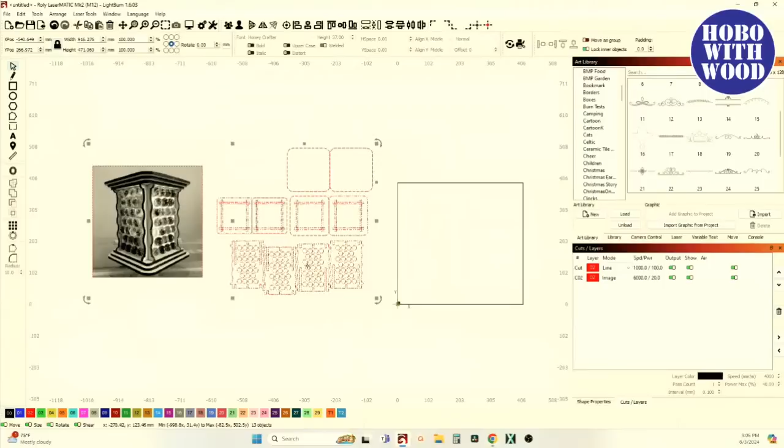But he was right. Check this out. Let's go back into Lightburn. There's the lamp project, and we're going to discuss that and all the different possibilities you can do with it. But if you've got a shape in Lightburn, I've just got a square, and then I wanted to cut out part of a circle of it and put it on a toolpath.

And I've got two shapes here. This toolpath is going to be the shape that I'm going to cut out of this rectangle. I select the square first, then select the circle, and then use tools and cut shapes. Well, that cuts it into two separate pieces. And if I want to get rid of this piece where the circle is at, I then have to select it and hit the delete button, and it goes away.

If that's the case, what I said I should have done was A subtract B, using the Boolean tools, and that gives you that result without leaving an open shape.

Now I just seen something. Ooh. Did I just learn something even more? Let's see here. So, A and that, and cut tools, cut shapes. Yeah, okay. So it doesn't give you the same result, because... no wait, it would if it's in fill mode. I take that back. It will work. I keep learning.

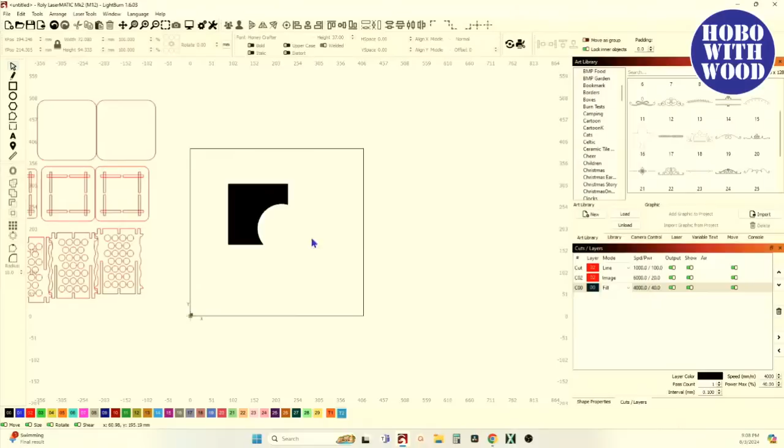So if you take this and put it in fill mode, select your square and then select your toolpath and use cut shapes, then you can select that bottom corner and delete it, and it'll give you that result, and it's closed. You can accomplish the same thing as A subtract B, but it only works if it's in fill mode. So that's new to me.

In fact, when I first read it, I said that doesn't make any sense, because the shape is the shape. And when you use that cut tool, you're using it like a cookie cutter to cut that out. But when it's in fill mode, it's looking at it like a solid piece of paper, and now you're just cutting it out. It's going to close all that out and take it away.

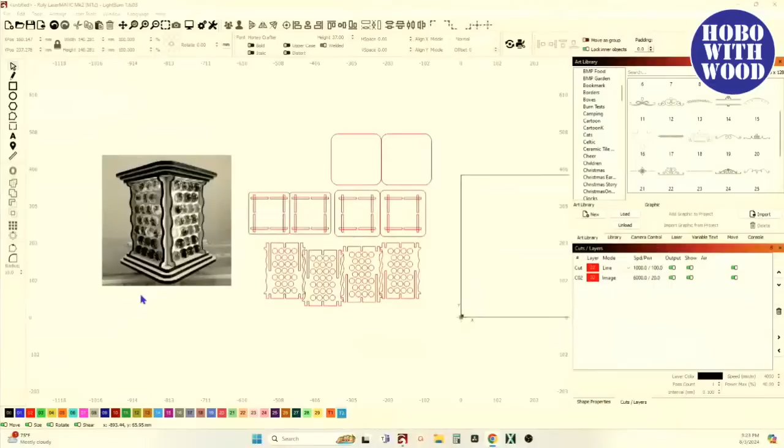All right, Lightburn. As I said, these four shapes are actually all identical. These two are facing up with the slots up, these are slots down - just two, duplicated and flipped. Then there are three different sizes. Two have slots in them for it to slide down onto, and the top and bottom do not have the slots, so it gives it a nice finish.

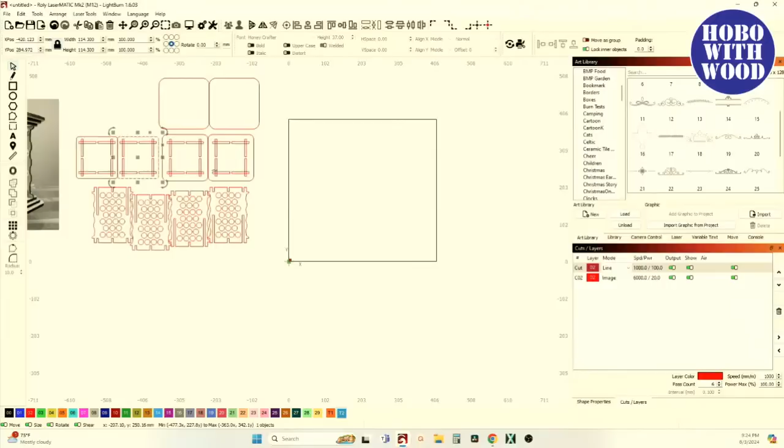First let's talk about the bases. I started with just a 4.5-inch square because of my puck and the material I used. I needed at least 4.5 inches out here once I allowed all the room, because my puck was about 3.5, or right at 3, give or take. Let's see if I get a 3-inch in there. Well, I got a tight fit, yeah. I think it's a 3-inch puck in there. So that's how I determined my size.

Most of you know how to use the offset tool in Lightburn. But using the offset tool and generating three different squares by size and using your radius tool can give you different results, and you might like one way versus the other. We'll show you what happens when you use the offset tool to create all of them versus creating new rectangles - squares, really - and using the same radius on all of them.

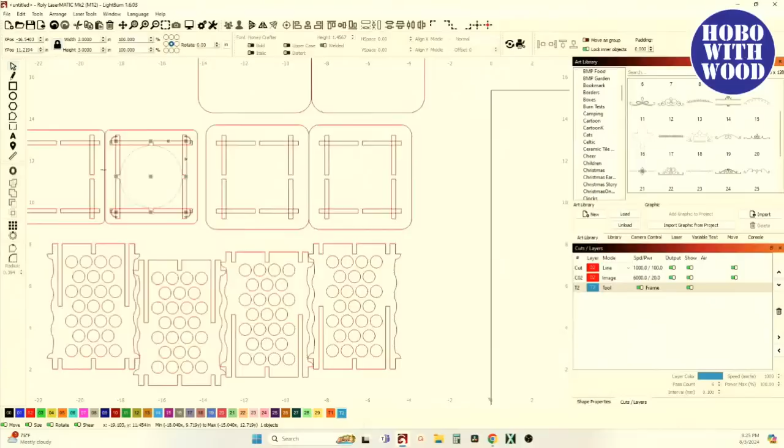So come over to your square tool, hold shift, and draw out a square. I told it I wanted 4.5 inches, locked my aspect ratio to 4.5 inches, which is 114.3 millimeters. Then I did a 1/4 inch radius - I come down to my radius tool, tell it to do a 1/4 inch radius, and went around to my corners and put in that 1/4 inch radius. If you're not worried about doing what I'm getting ready to do, you don't have to use the radius tool, but I did that 4.5 inch square with a 1/4 inch radius.

If you do another square and want it to come out a 1/4 inch around either way, that's a 1/2 inch extra, so this becomes a 5 inch square. I want to use that same 1/4 inch radius - come on, there, there, there, and there. Then put it in place and center it up. That was 4.5, that's 5. Now 5.5.

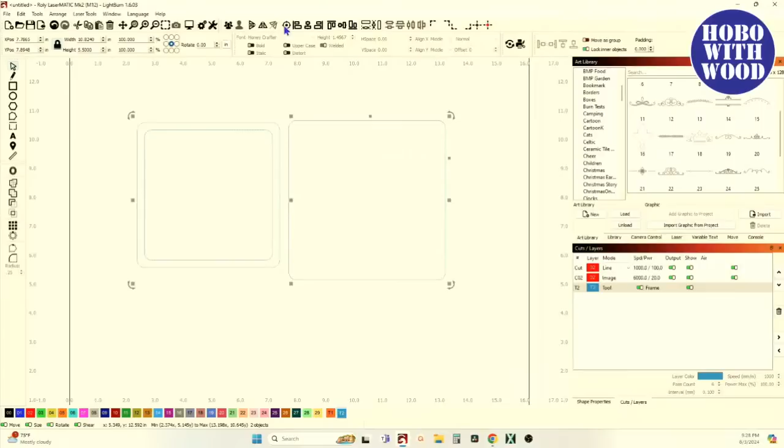All right, now put that in place. So there you have a 1/4 inch gap around the entire perimeter and a 1/4 inch radius on all 3 pieces, and that gives you a fairly square base. Now, if I duplicate my very first one, bring it over here, and just go to the offset tool and do a 1/4 inch offset outward - do not delete my original - say okay, then do it again and say okay.

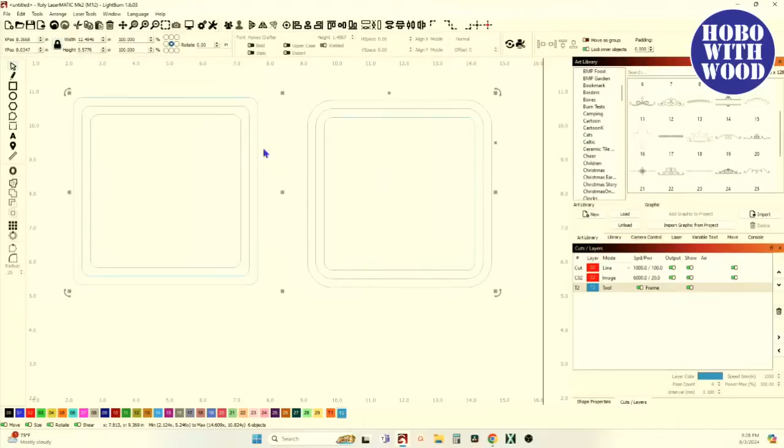I'm at 5.5 total size for both, but look, it's two completely different looks between those two pieces. This is more of a square base, and this one's getting rounded off more each time you come out, because as you do an offset, you are moving your radius. This is a 1/4 inch radius, this is a 1/2 inch radius, and this is a 3/4 inch radius. The radius increases each time.

Question from Carl: couldn't you use the shape properties instead of the radius? You can.

And that's why I said, if you weren't worried about doing a specific 1/4 inch, I did this by using the radius tools. But what Carl's saying here, if you come over to shape properties, say you've got a square, and we had a 4.5 inch square. If you have shape properties open, you can come down to your corner radius and just tell it 1/4 inch radius, and it puts four 1/4 inch radiuses on there. So yes, you can, Carl. Like I said, there's always another way to do things in Lightburn, and I'm happy to show that. But if I tried to show every single way to do every single thing that can be done in Lightburn, we'd be doing another 5-hour live stream. We ain't doing that ever again. There's always another way.

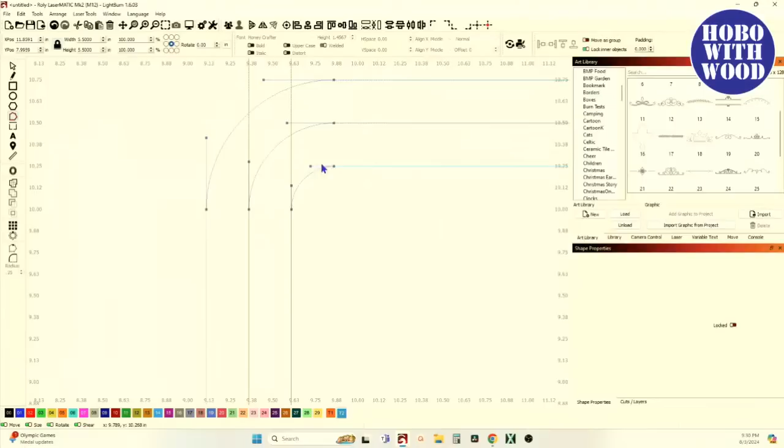All right, but I wanted to show you the differences between doing the same 1/4 inch radius versus doing offsets, so you can maybe see it. If I bring this tool line out to that edge and bring a tool line to this edge, then grab these and put them in node editing, you can see here this is a 1/4 inch radius, and that straight line comes up and it's not there. It's a 1/4 inch over here. Well, if I do the same thing with these, snap it to there and snap this one to here, and put these in node editing, you can see this line lines up where that radius starts, and this one starts where that one ends. So it's still symmetrical and it still works.

They just give you two entirely different... wrong button, stupid. Undo. Delete that, delete that. It just gives you two different end results on what shape your base will be.

Yeah Jeff, I'm saying never, never, never, never, and never, never, never do another 5-hour live stream again. Yeah, nope, sorry Kent, nope nope nope. Yeah, y'all silly, okay.

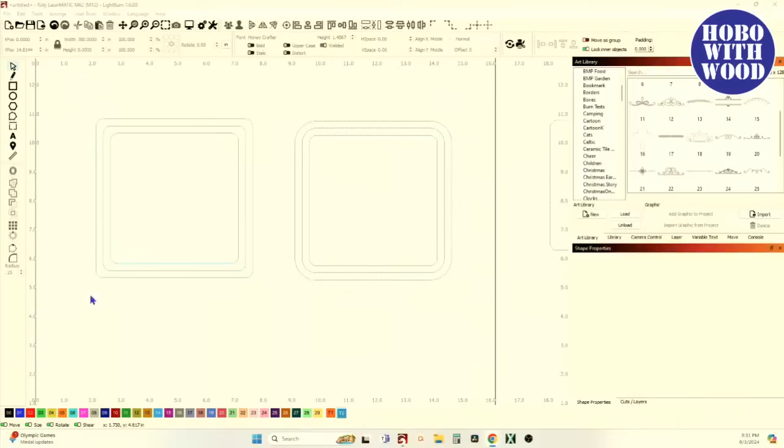So with that demonstration done, here's how you get some different looks. Like I said, I did the offsets. I created the first one and just did an offset for each of the three. So I'm just going to grab this, duplicate it, and send it to the center of the page. And some of you may not be aware of this. Right now I'm focused on this over here. I duplicated it and used my tool up here to send it to the center of the page. This little dotted zoom tool, if it says zoom to frame selection, click it, and it's just going to take you to wherever on the page that piece is. That's a cool tool too.

So if I take these pieces right now, I'm going to put them on a tool, ungroup it all. Ungroup. And I'm going to get them all, put them on a tool layer, and turn my tool layer off. So there's my 4.5 inch square that I put the radiuses on.

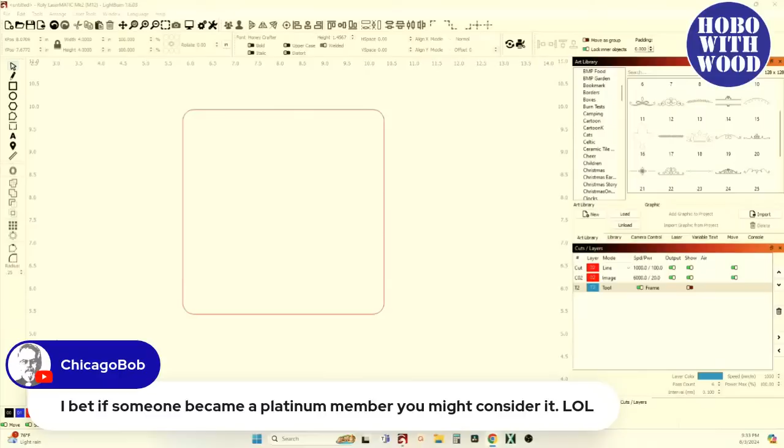Well, it's not a question, but there's a comment. Bob says, I bet if someone became a platinum member, me, you might consider doing it. Well, for those who aren't aware, there's actually four levels in Patreon. You've got bronze, silver, and gold. Wrong button. Bronze, silver, and gold. Bronze is $3 a month, silver is $9 a month, and gold is $20 a month. There is a platinum tier, and no one has signed up for platinum. Platinum is $5,000 a month. If someone was a $5,000 patron on Patreon, I'd come to their house once a month, fix their dinner, and talk to them about Lightburn and laser creations until I'm blue in the face. But yeah, for that platinum patron, I'd do a 5-hour live stream every day solo for them for $5,000 a month.

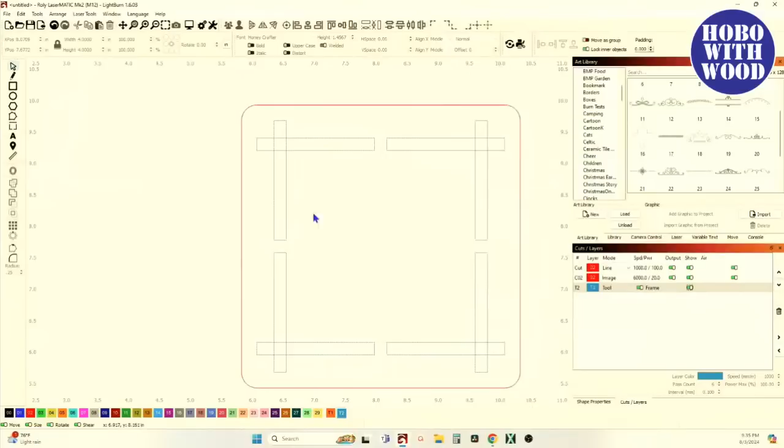So where do those need to be? Well, if you come over, those obviously you cannot create these until you've got this piece designed. So we're going to grab this and set it over here for a second. And I'm going to grab—well, we're not even going to worry about these right now. We're just going to start from scratch completely.

If I draw out a rectangle, whatever size it was I determined it was going to be, you start out with a rectangle. And if you're creating this piece for you to make from your material, you already know what your puck is, you know what your slit's going to be. I already knew I was going to be making it out of this 5mm maple that I've got, so I knew my slots were going to be 5mm wide. Depending on what material you're going to be cutting yours out of, you wouldn't make your slots that size—it's according to what material you're using.

Make that more like that. And so I said I had a 5mm slot. I'm going to unlock my aspect ratios, go back to metric. I'll say it's 5mm wide. And then how high, how tall does it need to be? Well, I wanted to do 3 bases at 5mm, so it's going to be 15mm tall.

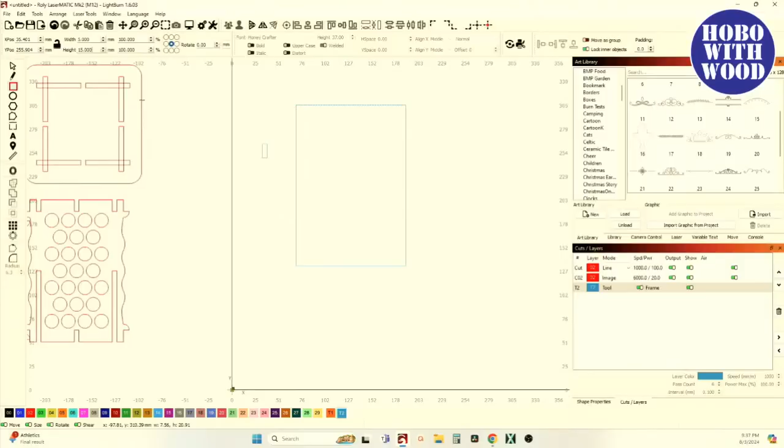So that would get centered and at the top like that, and duplicate it and put it at the bottom. So that's the first placement for the first slot. Then I need slots down either side.

So I'm going to come over here and just draw out a slot. I'm not even going to worry about the sizes because I'm going to key in what I want it to be. I'm going to tell it it needs to be 5mm wide. And then I'm going to bring it over here and align it to the top rather. And before I do anything else, I'm going to come back up here to my gears and set my movement.

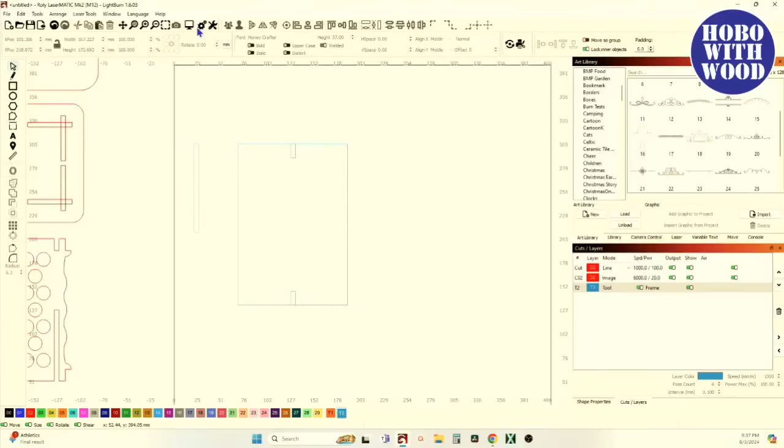I've already got it set here—my arrow movement is set to 10mm right now, so I said okay, that's what I want. I'm going to come back to this piece, select this, I want to go to top left. Then I'm going to select just that one, and use my arrow key to move it over 10mm.

Now I'm going to look at this piece right here, and its current height shows 173 points. I'm just going to tell it, change it to 170. And now I need to put everything, resize everything, or put everything back.

We'll group those temporarily and put it at the top and put this at the bottom. And if this was 170, I need to ungroup these, select just this one. And now this is where you're going to change your anchor points. Right now I've got my anchor point in the very center. Well, I've already aligned this.

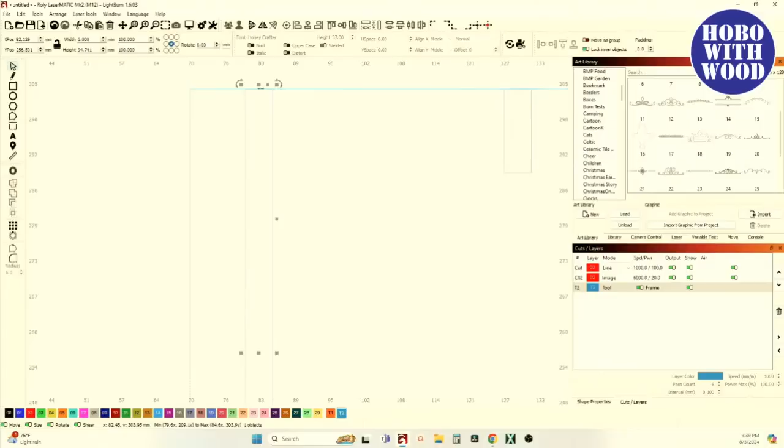I know I want it here in this position, 10mm off this, and I know I want it aligned to this top. So when I move this, I don't want to move it left or right or down—I only want to bring this up. So I'm going to change my anchor point to the center top.

And now if this was 170 high, I'm just going to come over here and say the height needs to be 170 divided by 2. Key that right into the height field and hit enter, and it's going to do the math for me and say okay, it's 85mm. So now I can Control D, duplicate it.

Hold my shift button, select the rectangle and tell it to align right. It didn't duplicate—undo. Select that, Control, and in fact, you just put this all on a red layer so you can see it a little bit better, or a black layer even. There we go.

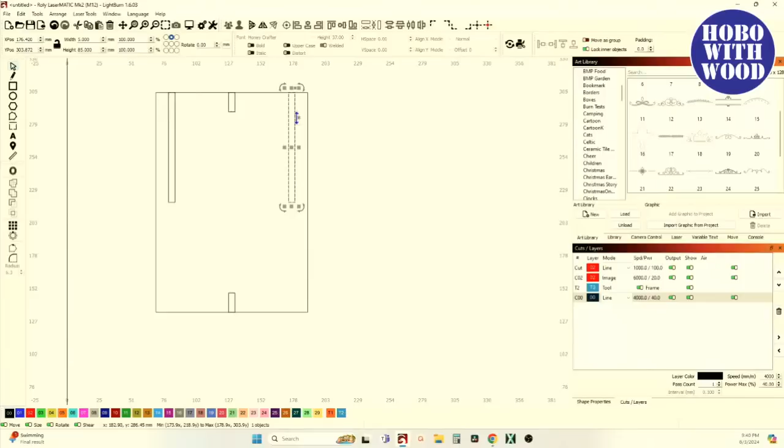I couldn't see the ants duplicate, but there's the duplication. Now hold my shift button and select that, tell it to align right. Select just that piece, arrow over one time to the left. Now it's positioned correctly. So I hold shift, select this one, group them together, hold shift, select the square, select that group, and do the Boolean subtraction, A subtract B. Group these together, A subtract that group, and there's the shape of this side piece.

I've got a groove at the bottom. Actually, I don't have my shapes here at this side. I designed this, put it together Tuesday and dropped it Wednesday, and I've forgotten what I did. But that's what's great, we can just undo and go back.

So these slots are done, but I need to have this size slot on each of these on either side, on this end. So I'm just going to undo one time, ungroup those, grab that, duplicate it twice, Control D, 1, 2. Now hold my shift button, select that, align it to the left, select it, arrow over one time.

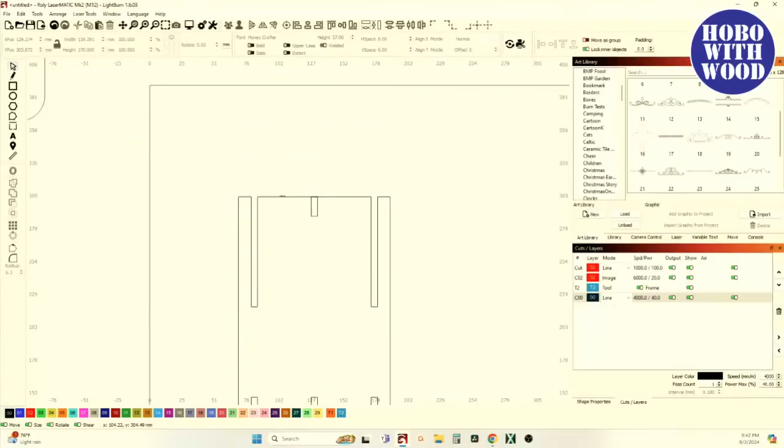Square or the rectangle, A subtract B. That gives me those, and then A subtract B. All right, now that shape is done.

If I say Control D, duplicate it, arrow it over, select them both, Control D, duplicate them, and then rotate them. Those four pieces would interlock together and make a perfect square. All you need now is just the bases to hold it all together, because I didn't put any glue on any of the four pieces to glue them up, just slid them together, interlocked them, and then glued the bottom on, didn't even glue the top on.

So let's look over here for any questions or comments at this point.

Let's see here. Oh, looky, who's in the house? Hey, and I don't know... my brain just went dead. It's too hot in here, ladies and germs.

Patrick, Light Source Engraving. Patrick, I saw your sledgehammer and commented on Facebook, but it looked like my comment even went away. Patrick did a sledgehammer the other day with one of his lasers, and it had the flag in it, but the union in the flag was blue, and it was a brilliant blue. Almost looked like it was painted to me, and I was like, did you get that kind of blue out of the laser? That was awesome. It wasn't so much that the blue was vibrant, it was all vibrant and uniform. It looked really, really good. So if you're still here, Patrick, that was awesome work. I liked it a lot. That was one of my favorite pieces I've seen you do.

Andy says, sorry, I got distracted. Did you make this with 6 mil? No, I made it out of hardwood. I've got some maple that I've processed, and this is 5 mil hardwood maple. It's got some nice grains in it when you put a finish on it. But I had a lot of 5 mil maple that I processed, and that's what I used here. You could use 4.7, 5 mil, or 6 mil plywood. I wouldn't do it out of anything real thin because now I got this off.

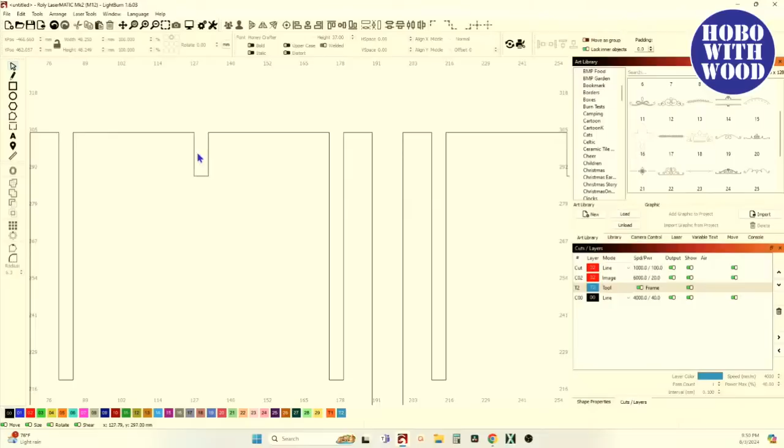So let's jump back over here to the design process and go back to LightBurn. All right, so I've got the basic shape set up for those to go together. This size was determined by the thickness of the material and then how many pieces I was going to stack on here for the base. I went with 5 millimeter material and 3 pieces, so it was 5 millimeters by 15 millimeters, or 5 by 15. This one was 5 millimeters and half of the overall height of that square. And then these were 3 of the 5 by 15s.

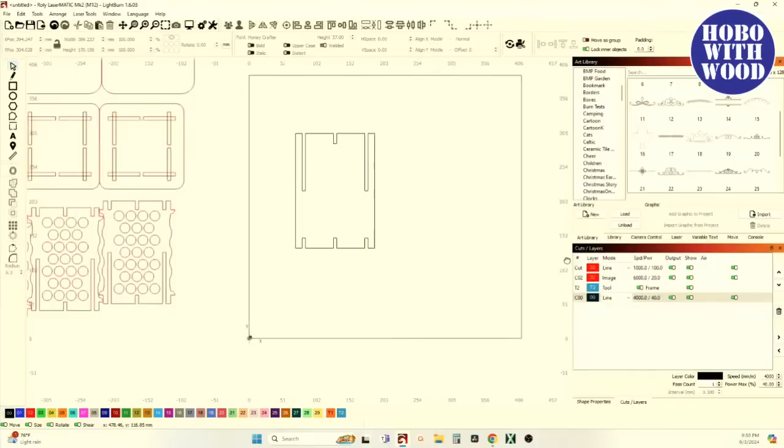Duplicate it, rotate it, and now they're going to interlock together, and your tops and bottoms are going to slide on. Now if you want to, and because these are all the same piece, there's no difference in any of them, if you want to do anything creative, delete all those. If you look here, I've got the wiggles down the side, and then I also placed these little quarter round pieces here, so it's kind of like quarter round molding up at there. It's like, okay, well, where do those go, and how did you do that?

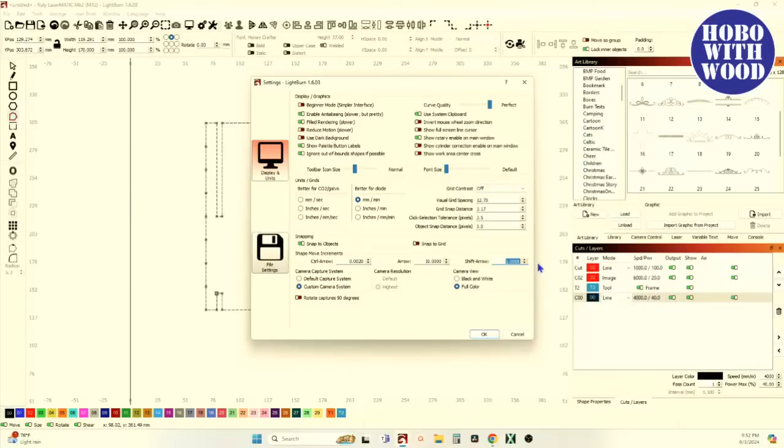Well, since you only have to do it to one piece, you can come in here to node editing. I'll come up here just so you can see how the letter M works. A lot of you guys have seen me do this already, but in node editing, when you hit the letter M as in middle, there's no nodes in here right now, but you hit M, it just created that node right there, puts it in the middle of those 2 nodes. Now I'm up here at the top corner with my cursor, I'm going to hit M again, puts it there. It'll keep putting it in the middle of the closest nodes. So once you've got all those nodes in there, let's come up here and check my movement tabs. I've got 10 millimeters, and let's do a shift movement of 2.5 millimeters.

No, let's just do 3 millimeters. Okay, so now that I've got that done, I'm going to hover over each one of these nodes and hit the letter S, hovering over each node: S, S, S, S, and S.

Then I'm going to come up here, grab one, skip one, grab the next one, holding the shift button. The squares are the tangents for the smooth curves. You want to get the round dots, every other one. So skip that one, I want this one, skip that one, I want this one. Now I've got every other node selected.

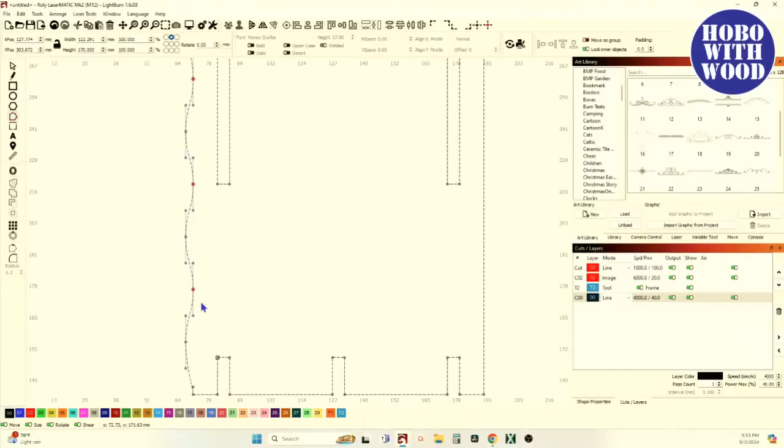I'm going to hold my shift button and arrow out one time, then come back in and grab the other ones, here, here, and here, and arrow in. Oh, I didn't hold my shift button. Shift, there we go.

So now I would repeat the same process over here, and that'll give me my squiggly lines. I'm still at 5 millimeters, or I think that's about 8 millimeters, give or take, so still going to be fairly strong there.

And here, what I might look at is, during my design process, I'm like okay now, do you know why airplane windows are round? They're all radiused because corners are weak points.

So in this design, when I'm looking at this right here right now, see how close this corner is to the edge of this material, that is a vulnerable spot. So if I was designing this, I would actually go back and undo.

And go back to node editing and see where this one's at. I would select it first, skip that, come up here, and oh, I didn't mean to do that. Oh, now it's going to thunder. Now here's something, if I try to do undo, that works, but if the node was still selected and you try to undo, it wouldn't work.

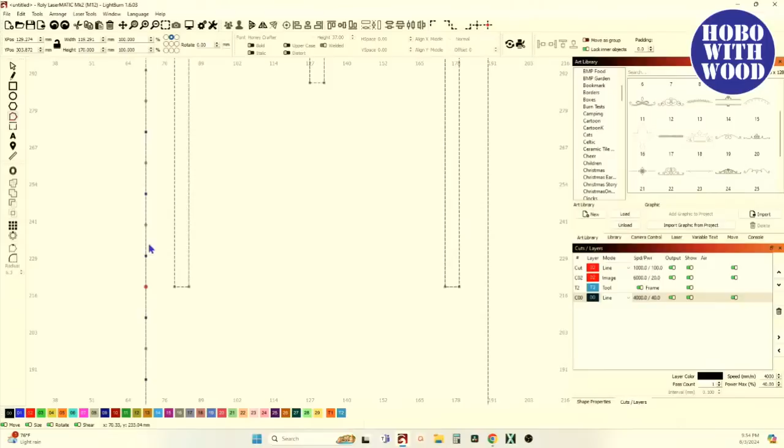So I'm going to grab this node, hold my shift button, skip this one, grab this one, and we're going to leave that there like that. Then come down, skip that one, and grab this one. Now instead of bringing that node in, making that a vulnerable spot, I'm going to hold my shift button and take it out.

Before I move these, I'm going to do my quarter round. I'm going to get my circle and draw out a perfect circle. As I said a minute ago, how many ways can you do things in Lightburn? A bunch of ways. Here I'm going to get, I want a quarter round.

And the way I'm going to do this is switch, draw out a square, take and grab my circle right in the middle, and I'm going to drop it there.

First, I'm going to show you 2 ways to do this. Duplicate that, Control D, duplicate it, bring that over here. Right now, if you go into node editing, you don't see any nodes, but if you convert the circle, right click, convert it to a path, go to node editing, and I'm going to select this bottom node and delete it by hitting the letter D for delete, then hover over that line and hit the letter L for line.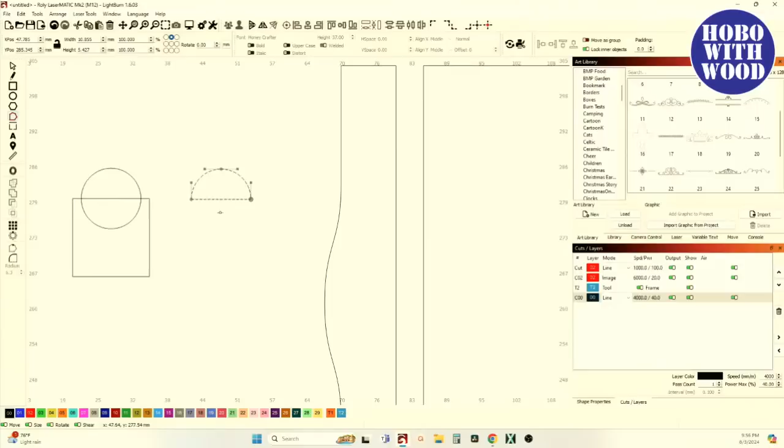And there's a semicircle. Then I'm going to come over here to this one and hit the letter D to delete. Well, actually, I don't want to completely delete that one. Before I do that, I'm going to come back over here and grab one of the tool paths, and snap it right there in the middle. Go to my node editing again, and actually not even delete it, I'll take this, hover over that line and hit the letter L for line, made that a line.

Now just drag that node, or I'm not going to drag it because if I drag it, it can go up or down and that won't be right. And here you see the node is still selected, it's red. And if I hit the undo button, well hey, now it works. Used to, if it was selected, it wouldn't work. Maybe they fixed that.

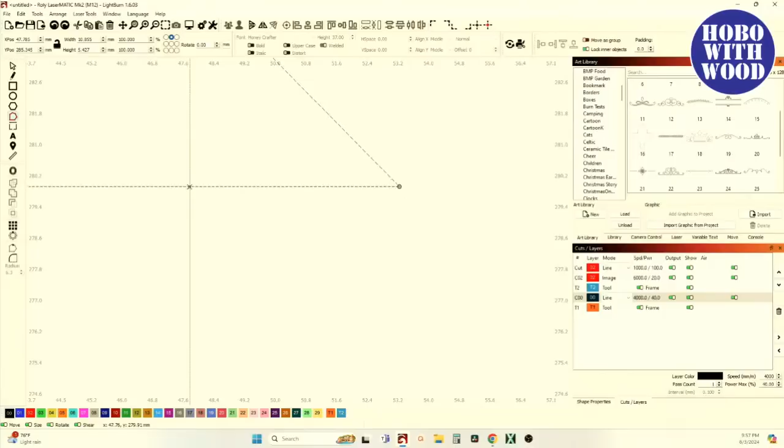So instead of dragging that, I'm going to hover over here and hit the letter I for insert. That's where I want that to be. Now, undo, select that, and letter D to delete it. So there is a quarter round. That's one way to do it.

Or you could use your Boolean shape, A subtract B, the Booleans, to get that, and then draw out another one. I didn't want to draw that one out, I keep forgetting to get my selector tool. Selector.

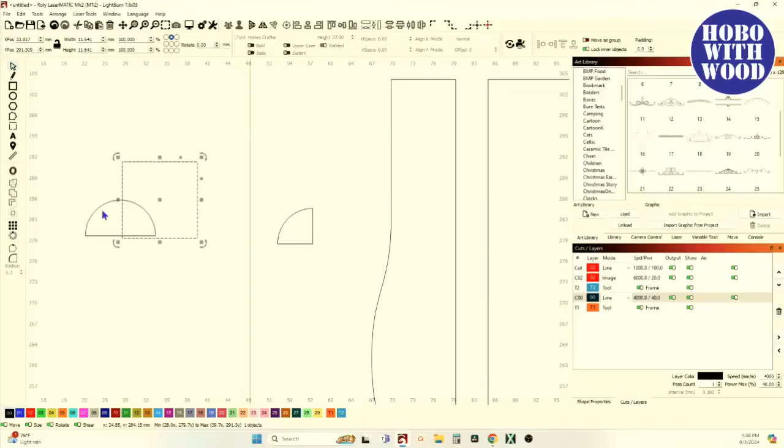Snap it right in the middle there. And then A, subtract B. And there's a quarter round. So if you're not real good with node editing, you can get there by just using cut shapes to do those things. There's 100 different ways.

There's always more than one way to do something. And if anybody tries to tell you that this is the one way and the best way, ignore them, because there is no one best way. A right brain person doesn't think like a left brain person, an analytical person versus an artistic person. You may not comprehend that easily what they're talking about, but there's another way to get there that your brain goes, that works, I understand that. Well, embrace that, do that. But never let anybody tell you there's one way to do things.

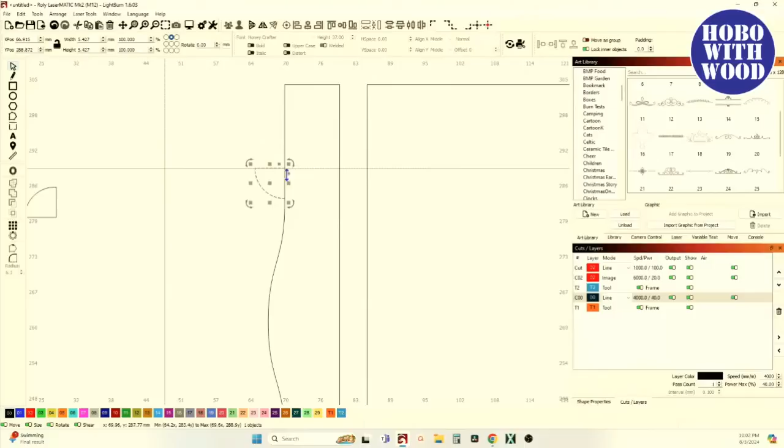And I grab that corner right there once I get my crosshairs and drag it right into there. Now I've got that positioned right. I'll grab this one, bring it over here and rotate it, and grab my crosshairs. That's not rotated correctly. Get it there. There we go, grab those crosshairs there. Done.

Now I got to do the same thing at the bottom. So I'm going to hold my shift key, grab that, say Control D, duplicate it, bring them down. I'm not going to worry about positioning them right now, but these two, group those together and weld it. A and B welded together, and that puts those tabs on there.

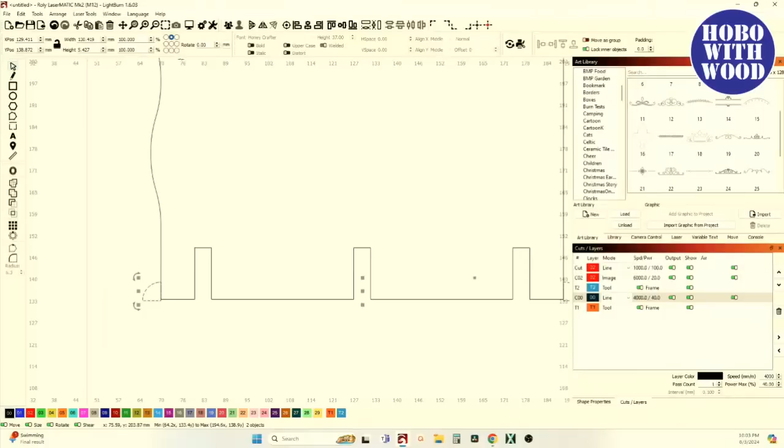And these, grab those, and we need to mirror them. I can grab, and you can grab those toolpaths from anywhere. I'll come up here and just grab another one and bring it down to there. And bring those. Come on, get it to snap right into the... oh, messed it all up. Get in there, and get my crosshairs there, and snap. And that one's not right.

Snap. Now grab those, group them. Grab those and weld it. All right, so those are in position.

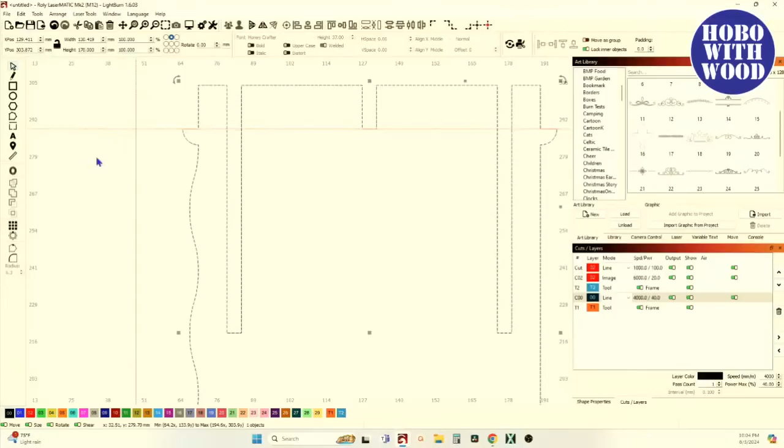And now if I wanted to come back over here and move some of those nodes inward, I knew these I moved out. So let's grab this one and this one and just bring it in. Hold my shift button and bring it in.

Well, no, that's not going to work because I've already done some other stuff to it. So if you're going to do that, look for that weak point first, move it away from your corner so it's not any weaker than you want it to be, or that you can prevent it from being any weaker than it could be. Make it as strong as possible - there we go, that's the words I was looking for. Make it as strong as possible. Come down there and find that middle point. Move that node out instead of bringing it in. Then once you move the ones out, bring the other ones in. Then go add your quarter rounds in, if you're going to do that.

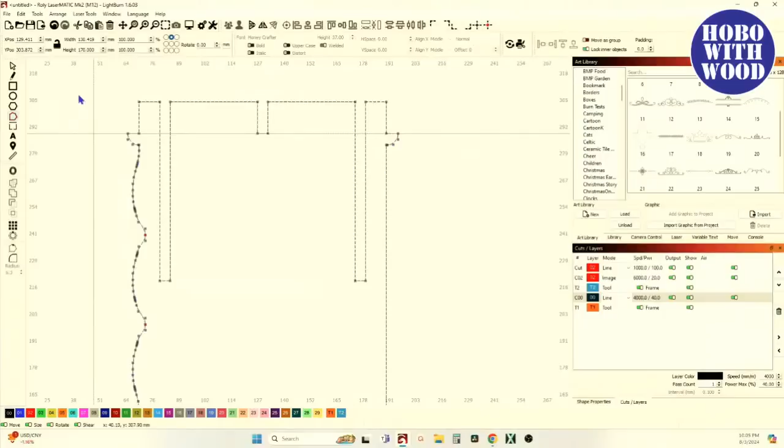So go back, there we go. And then go back to here. So that will give you your wigglies, the wiggles, and give you your quarter rounds. And then once you've got that done to both sides, you can just duplicate it and then duplicate your duplications and rotate them when you've got 4 sides.

Looking at it, wouldn't take too much to change it into a pencil. Yeah, yep, leave the top off. Yep, and that's the thing. That's why I say this design, this concept.

I'm doing it - this one was an LED light, but this box, the way that it assembles and goes together is so much easier than a whole bunch of slots and tabs that you're having to put, 12 slots and tabs together and line up all your fingers and worry about your offsets and all that, or your kerf and everything else, because it's one design. You're not having to create male and female slots and fingers and slots and tabs. You've got one design, you're creating one panel, and then duplicate it, and then duplicate it 4 times, and flip 2 of them. That's why I said the possibilities of this style of box is pretty endless.

So yeah, absolutely a pencil holder, and this would be a little bit tall for a pencil holder as it stands, because with a brand new pencil it would work, but as they get sharpened, they'd be kind of small. But you could do half this size. It's just an easy way to put a box together. But absolutely, you are 100% right.

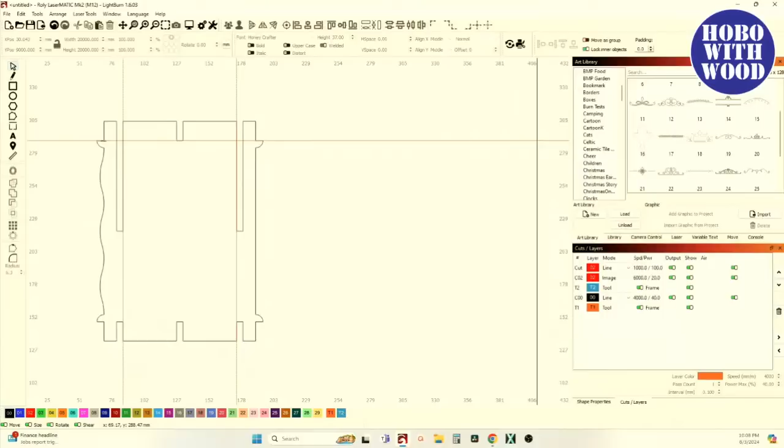And then I need to drag down, and that's going to go to that corner right there. And drag another one down—oops, didn't get one. Drag one down here, and it's going to go to there.

So that area in between those toolpaths is where you could place your marbles and or your design, whatever you want it to be. And what I would do, if you're going to create a base template, a base box, this is what I would strongly recommend doing.

Create a base template like I did for the lantern. I've got a very base template for the lantern that has no artwork in it at all. It's just all the math's been done for you for all the slots and tabs. Do a base template for this box with no artwork in the middle, no holes for marbles, no cutouts or stars or anything else, no matter what you want to put in there. Don't put anything, just do a base template.

And when you're creating this piece right here, do what I've just done with your toolpaths, then take it one step further.

Those toolpaths show you where your area needs to be for your holes, the artwork, whatever it's going to be. Come up here to your rectangle tool or your square tool, draw you out a square from that corner to that corner, and put it on a blue toolpath. And you can get rid of all of these guys.

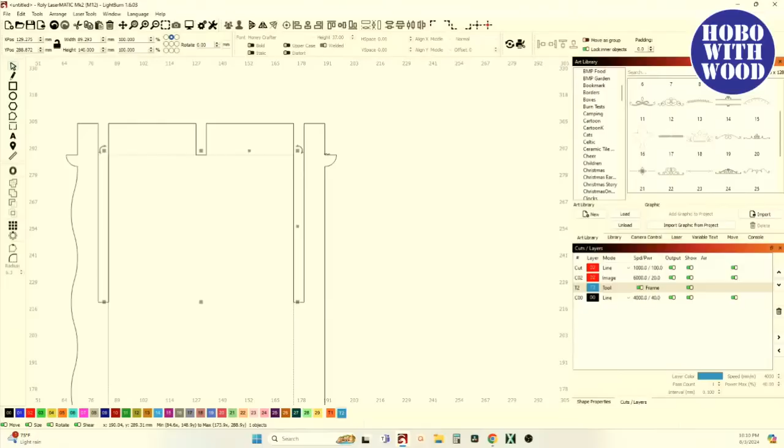It does add some strength to it, but it also helps—so whenever you're sliding this down, they have a place to rest, and it could even be a glue point on your bottom base if you're going to glue the bases together. But now you need to figure out the spacing for these pieces.

Where do they go? How am I going to get that lined up in there? Well, you need a slot that's going to be 5 millimeters, because I'm working with 5 millimeter wood. Whatever material you're working with, that would be your height. And I'm working with 5 millimeters, so we do that. Well, how big does this slot need to be?

If I would have actually just grabbed that—delete it—if I actually would have just started drawing my rectangle over here, come right there and get my double crosshairs, and then just draw out until I got down to those crosshairs, that would give me my width. Then all I have to do is unlock it and just change my height to 5 millimeters. There's one square.

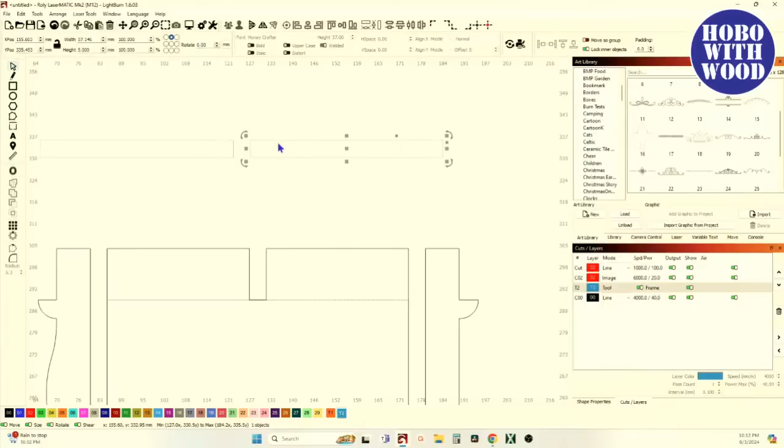And I know it's 5 millimeters apart between the two. So if I say Control D, duplicate those, and move it all the way over here, select the two, Alt Shift H—Alt Shift H is arranging them together horizontally. And then in my movement tabs, just change that one to 5 millimeters real fast. And then just select one of them, move it over 5 millimeters. Now those are spaced properly apart.

But now where do they need to go on my piece over here? So I'm going to come over here and actually say these are going to go like that. Put that in. Oh, I just undid—what'd I do? Put that back in metric. There we go, 5 millimeters.

All right, so from here to here is the distance from that corner to that piece, and the overall from there to there.

And here, when I started this, I just drew out a random rectangle. I didn't put in exact measurements, and here's where it's biting me in the butt by not doing that. So I've got some random 119.292 millimeters instead of 120, or I should have made it a fixed even number to begin with. I didn't.

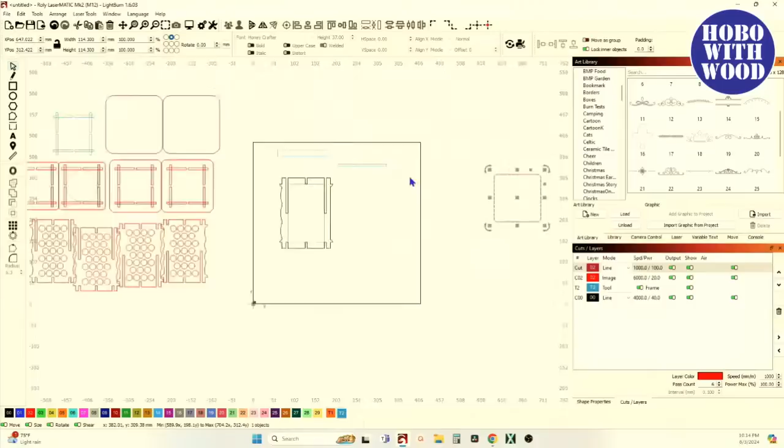So if I take these two pieces that I've just created, I'm going to grab this base, bring it over here, select these two. Are they grouped? No, I'm going to group them together so my spacing doesn't move. Now I'm going to tell it to go to center.

I need to take that back again, because this piece, that square, that rectangle I had there was based on my initial design of 4.5 millimeters. So I can't use that, because I didn't put in that initial measurement to begin with. But I'm going to take that and delete it.

119.292, draw out a new square, 119.292. I didn't have the aspect ratio locked. All right, there's a perfect square.

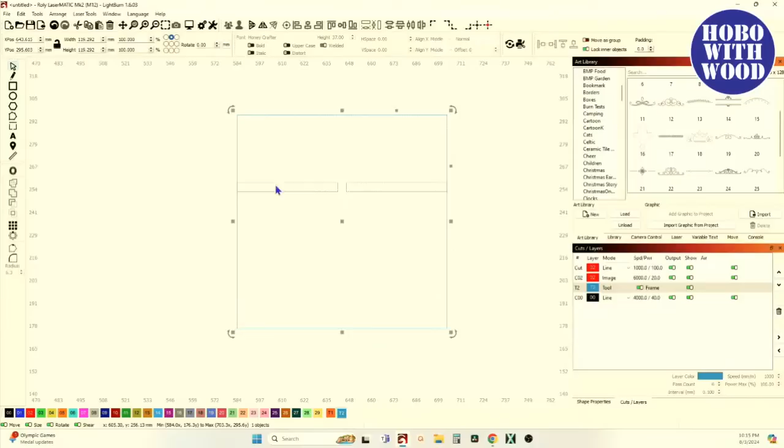Center that up. That's how big the light is. If I was to measure... I just poked out a marble. If I measured that square in there, that's where that measurement would be. And I just poked out another marble.

I want it to be offset a quarter inch, and we're going to do corners right now, not radiuses. So this can stay on a tool path, and that would go on a cut path, because that's going to be the actual cut size.

Using the suggestion earlier, come over here to my shape properties. And here you go. I did an offset, and I talked about this, I think, in one of the last videos.

When you do an offset, it's not a shape, it's a path. And because this is a path, when I go to shape properties, I don't have the option of controlling the radiuses. See, there I've got it selected, and I'm in shape properties. There is nowhere to put in my radius.

So I'll go back over here. I know I want it to be a quarter inch, so I'll just put in a quarter inch and do my 4 corners real quick. Select radius. Oh, what are you doing there? It's screwed up. So when in doubt, start over.

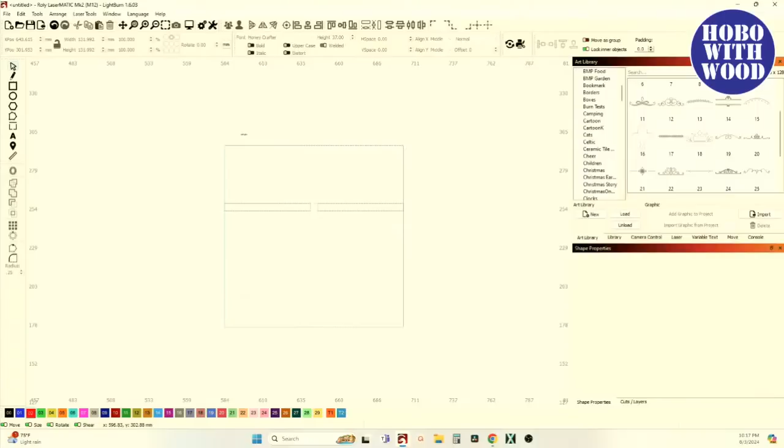Delete that. Instead of doing an offset, I will do a square. Just tell it 119, aspect ratio lock, 119.292. And then I can do my radiuses of 0.25.

And why ain't it working? What's going on? The heat is killing me. The heat is killing me.

Yeah, I am in millimeters. Oh, thank you. Told you the heat's getting to me. I'm in millimeters, and I said 0.25, so it did a quarter of a millimeter instead of a quarter of an inch. Thank you, Mark.

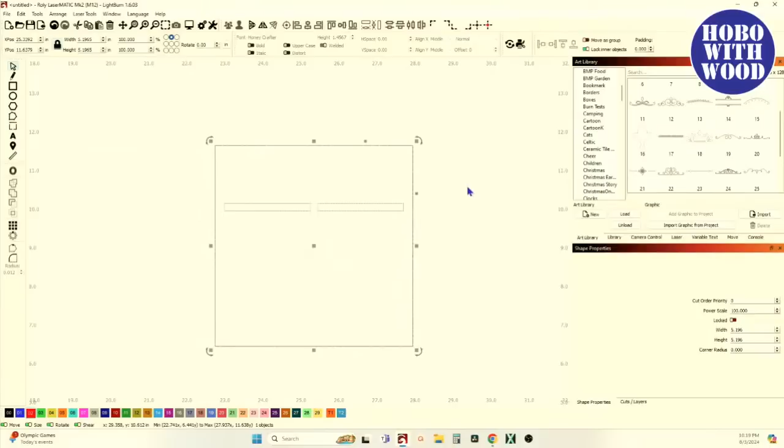And now go back to cuts and layers, turn off my toolpath. Do a quarter inch radius on that. Inches, yep, and a quarter inch. Why ain't you working? 0.25. There we go.

And get this back to where it should be, minus 0.5. There we go. And put it in the center. Okay.

Sorry about that, ladies and germs. I was all over the place with that one.

Tommy, what's wrong with my AC? The squirrel cage on the outside unit's still working, but my squirrel cage on my air handler quit working today. I think I got a capacitor that went out. Fortunately, I've got family that does HVAC. They're coming tomorrow, hopefully I can put a capacitor in and get the fan working. I'll be good, I hope, but we'll see. All right, so...

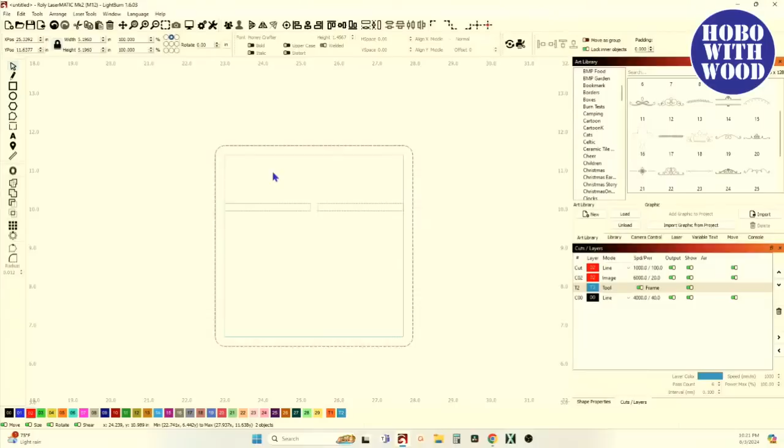There, the blue toolpath is the square shape of the pieces once they interlock together. I did a 1/4 inch offset with a 1/4 inch radius. Now I can take this piece and bring it up here and align it to the top, and that's where that would go.

Now select that, hold my shift button, select that toolpath, go to my circular array and tell it I want 4 copies, and say okay. That creates those 4. I'm going to take this toolpath, a square, and delete it just so you can see that. So now that gives you those 8 individual rectangles instead. And then I'm not going to weld those together. I could take that and weld them all together and you'd have 4 slots.

And no, let's see. Even that's wrong.

You guys know I don't normally fumble and bumble like this, but I don't know what the temperature is in here, but it's miserable and it is affecting my brain tonight. That, and the fact that I've just worked too hard today.

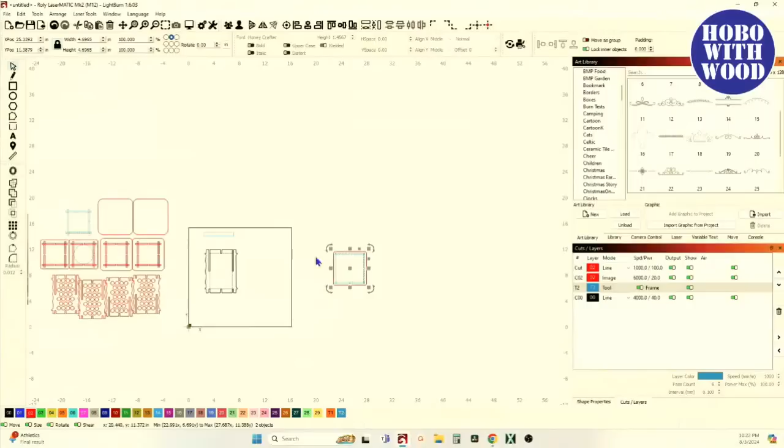The problem now is I did not allow for the overlap in the corner, like this right here. So what I just showed you is wrong. This... undo.

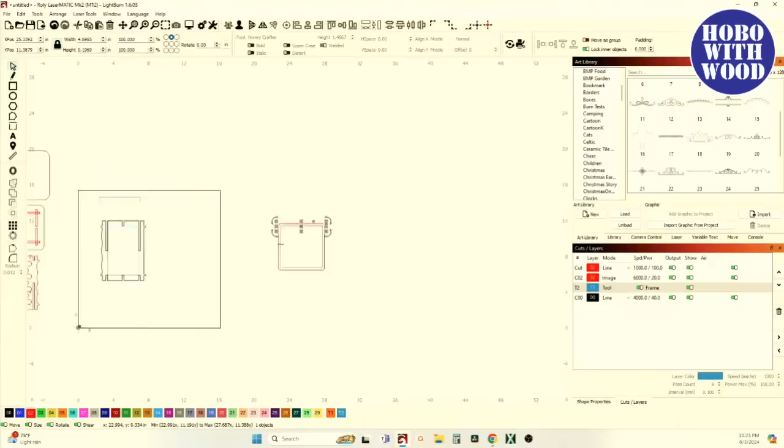Undo, there we go. So these are the actual widths of the total piece, but I need to have them intersect each other. Like, in fact, I'll grab these, bring these over here, like so.

So if those are there, I want to bring it down. Where is my movement tools? Move there, I'm going to bring it down. I'm going to go back to metric and set my movement to 5 millimeters. Bring that down, arrow 1 time. And now if I hold that and do the radius, there we go. That gives me my corner overlap.

My most sincere apologies for my performance tonight, but my brain is cooked. It really is. I only got one video out this week because I've just got so much going on.

So my sincere apologies. But by moving those down, then doing your circular array, it gives you that corner overlap and allows those pieces to slide into each other and lock into your tops and bottoms. And put those all on a cut path.

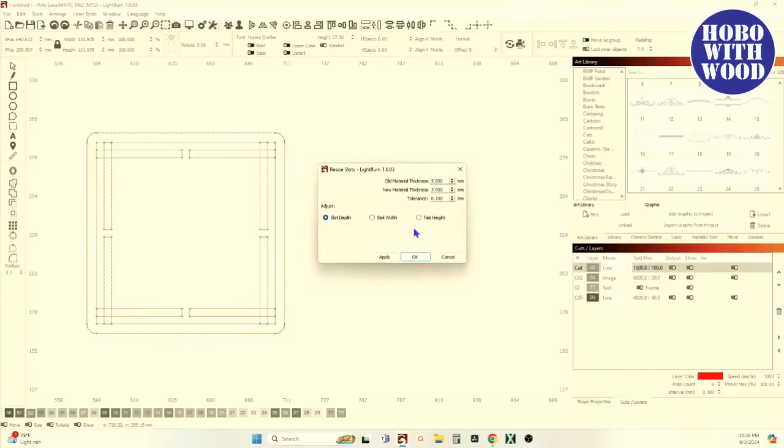Tools, resize, 5 millimeters, slot width. There, you can change your slot width and make it from 5 millimeter to 3 millimeter wood. But if I was to weld these together, that would work with my 5 millimeter material. But now when I select this and go to my resize slots and selection and tell it 5 millimeter slot width, it doesn't recognize these as slots anymore because of the node placements. When you weld it together, you get too many nodes and it will no longer work with resize slots and selection. So Bob, that's why you leave those separate.

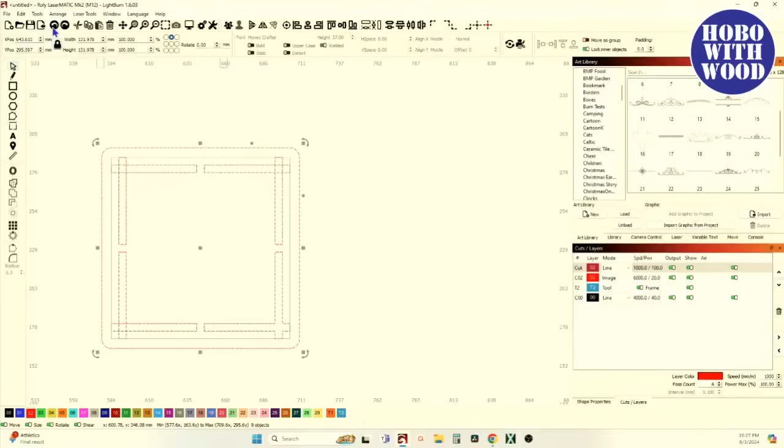All right, once you've got those and your placement right on them all, you can go ahead and group those together. Grab that outer piece there.

Depending on if you want to make it round like I did, you can just use your offset tool, which is a lot faster. If you wanted a quarter inch space around it, you would actually do an offset of a quarter inch. Am I in inches? No, I'm in millimeters.

Let's put that back in millimeters, go back to inches, and offset a quarter inch. That gives you one. So then you would just group those, say Control D, duplicate those, hold your shift button, select that offset there, and drag it out.

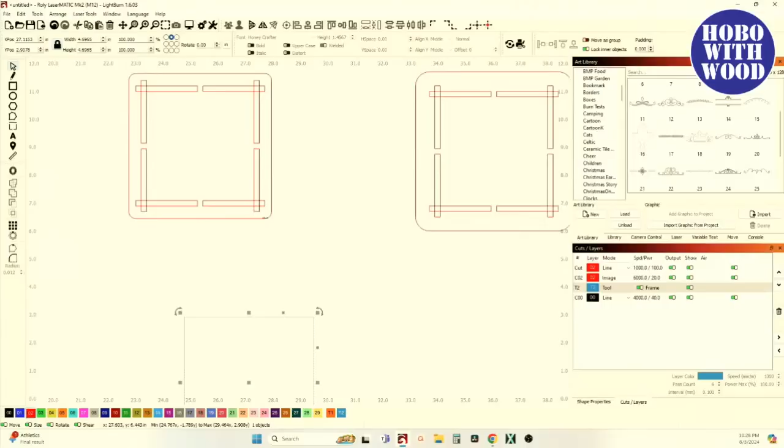And now you've got your second layer with the slots already in the perfect placement. You've got your first layer, and there's your toolpath. Grab those, make sure they're all grouped together, and group that. So there's layer one. And there, say offset again.

And there would be, without the slots, your third layer. So 1, 2, 3. That'll give you your three layers for your base and or your top.

Before I jump there, I'm going to come over here and look and see how many of you are fussing at me, cussing at me, throwing rocks at me because things have just been all over the place. Let's see here, there's my comments. Oh well, even though I'm really blowing it tonight, we still got some people learning some stuff. So yay, glad to see that.

Yes Mark, I do appreciate you pointing that out. The brain was just, and Mark wasn't the only one to see it. Tennessee noticed it too, yep, a couple of you. See, y'all paying attention. Thank you, I appreciate that.

Let's see here. Good, all right, exclamations - these are the same mistakes I would make, I try to learn from them all. Don't mind the mistakes. Well, I'm full of mistakes tonight, Craig.

Let's see here. Yeah, and Bob says that makes sense. Yep, so leaving those separate.

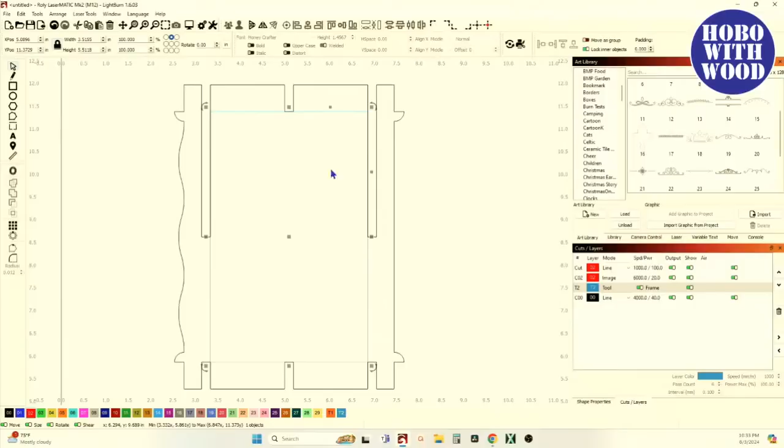So back over here, I created this earlier. We've got that toolpath, so that is the area in which we have to work to put whatever artwork we're going to do here.

Now, I would recommend, for safety and strength, coming in at least 5 millimeters inside that cut. Right now I've got my anchor point at the top center, so I'll put it back to the middle. Unlock your aspect ratio, I'm going to go to millimeters. Right now the width is showing 89.294, so I'm just going to right click at the end of that and say subtract 10 millimeters.

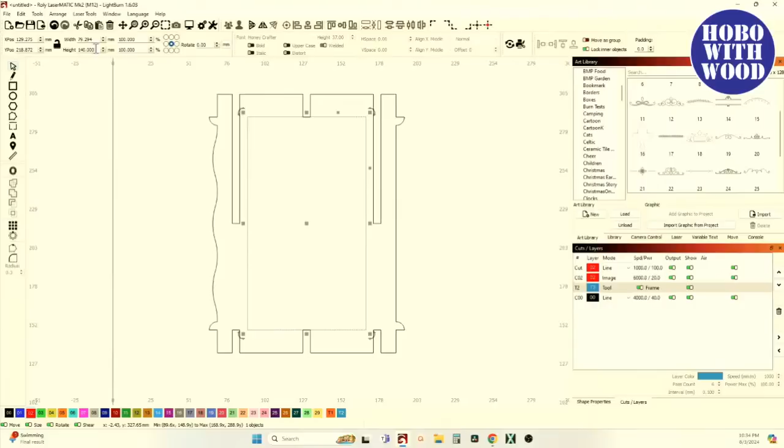And that moved it in 5 millimeters on either side of that cut. I'll do the same thing for the height, subtract 10. That way, when my base and lid snap on, everything will be 5 millimeters from the edge there and 5 millimeters from the edge there. So that would be my actual work area for my artwork.

Now, I think earlier it showed... well, we'll just go over here and look. Was it that one? I don't know, can't remember. Brain. Nope, wasn't that one. Well, go back.

I think they were about 16 millimeters in diameter. If you're going to use marbles, the max diameter was 16 millimeters. If you put 16 millimeter holes in there, the marble would drop through, so you wouldn't want to do that. You want it to go through enough, though, that you have some area to glue to, so you might do 13 millimeter holes.

And I didn't have the aspect ratio locked. There we go. Put it there and line it up there. Then use your array tool.

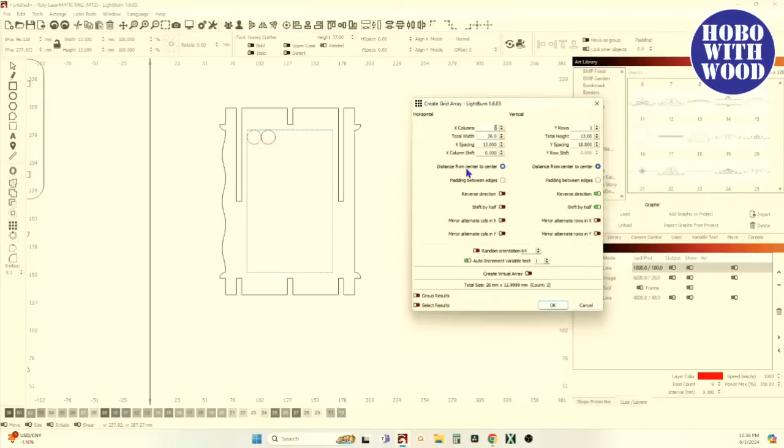I'm going to first create a second column. Here, since I've got distance from center to center at 13 millimeter spacing, they're butted up against each other because it's going from the center of this circle to the center of this circle, 13 millimeters, which butts them up. If I change that to padding between edges, with this 13 millimeter X spacing, it would put them apart from each other. Center to center butts them up, padding between edges spaces them apart.

Well, I don't know what my spacing can be or should be. I do know what my art area is, though. I know how big that rectangle is for the artwork. And this is what I learned with the grid array this week.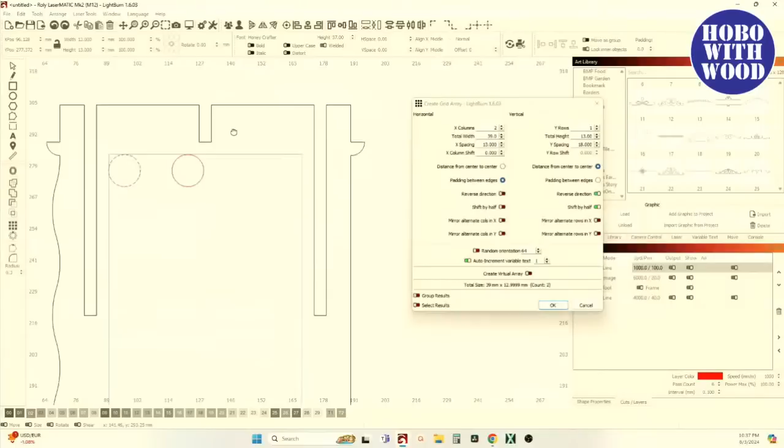If I cancel this for right now, I look at this toolpath, and it's 130 millimeters high and 79 and a quarter millimeters wide. So if I select that, in fact, because my brain is cooked, I'm going to put that in here so I can remember it: 130 and 79.294. Otherwise, I wouldn't remember that to save my life.

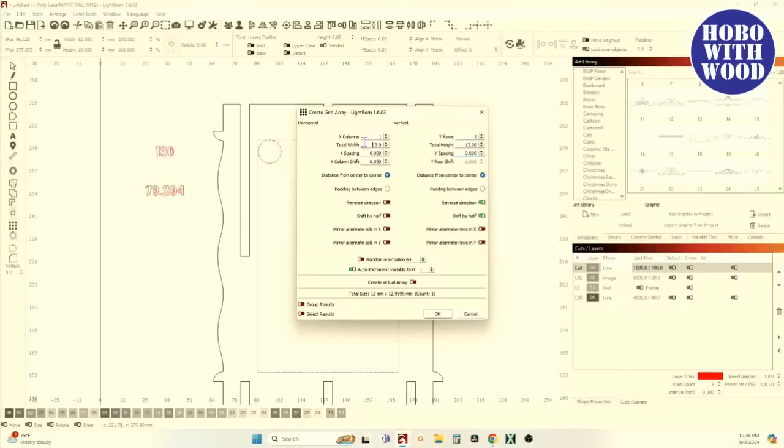But those are the dimensions of that toolpath. If I select that circle, go to the grid array, and put my X spacing at 0, put my Y spacing at 0 for right now. I just fat fingered that, so I'm going to start over. Zero everything out as far as all my spacing goes. So I've got 13 millimeter total width and one column, one row.

If I come down and change this to total width is 79.294, 79 point... oh, come on. Fat finger, fat finger, fat finger.

Grid array, all right, I'm going to create... I'm on X spacing, we'll go ahead and give it a padding between these, and the spacing's not going to work out, they're not going to fit. We're getting there, folks. It's not going to fit when I do this, but watch what I do to make it work. I'm going to put in here first 13 millimeter X spacing, create my columns. Actually, you know what, I need to do more than that, so we'll do 5. There's 5. In fact, if I know I want it to be 5 and 4, come on.

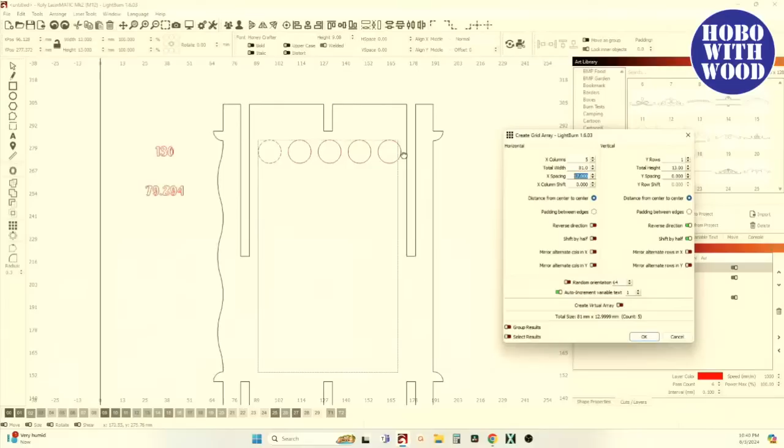I give it 5 rows and start increasing my spacing. It's like, okay, well, that's a little bit fat. And come down here and give it 2. And we need to give that the same spacing, shift by half. And now rows, I'll keep coming down. There we go. It's like, okay, so that fills the entire art area. But it's overfilled. It's too long and it's too wide.

Well, now that I've got this in there, if I come back to my grid array and I use my measurements, 79.294, come up here to total width, 79.294, and the height is 130. 1, 2, 3, 4, 5.

I don't know if y'all can hear that or not. But the total width changed. I don't know why it's not letting me put in those. Total width is 79. Oh, 79.294 and 130.

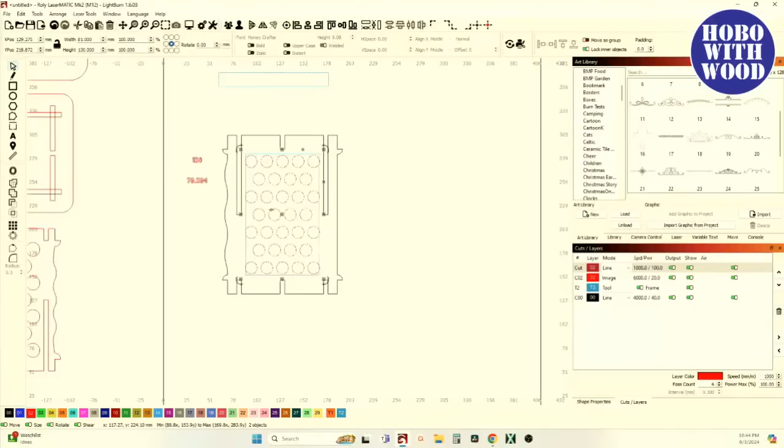That would be one option. But this is what would be kind of cool. If you're not going to do, if you like the idea of doing this simple box, but gluing each of those marbles in is time consuming. And if you're going to do the marble box, glue all your marbles into place before you assemble your box. Glue all the marbles into the panels and then assemble the box. Otherwise, you'll play heck getting those things in there.

Here's another option you can do with the artwork. If you're not going to do marbles, you want to do something cleaner and simpler. If you were going to do a simple star, and I should save my star, and I don't know why. But if you haven't ever created a star, use your polygon tool, hold your shift key to draw out a perfect polygon, go into your cut or your shapes properties and change it to a 5-sided shape.

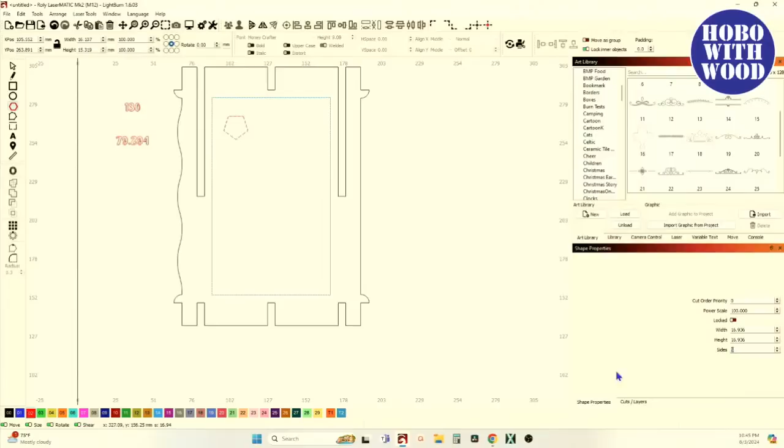Then come up here, grab your pencil tool, and connect the 4 corner or the 5 corners of the pentagon. There, there, there, there, there, and there. Then delete your original polygon. Mirror that so the star is not upside down, or flip it. There we go. And then do a 0 offset of your star and delete the original. And there you get a perfect star.

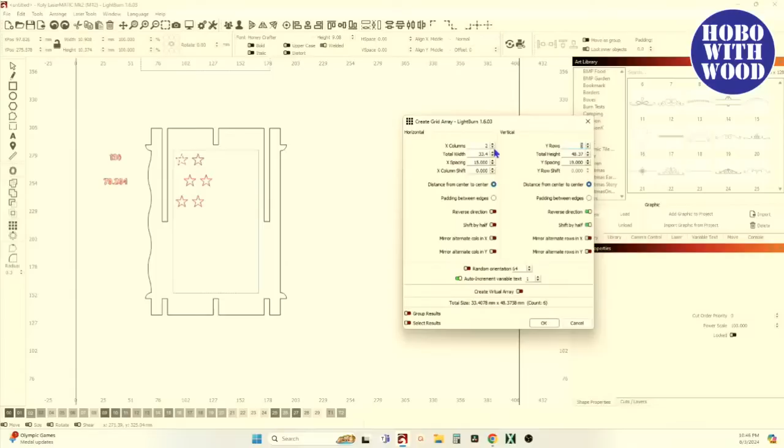Now I'm going to drag that down a little bit. I'm going to come up here and I'm going to put it right about there. And now I'm going to use my array tool. And that's, we'll do center to center and columns. We'll bring this down about like that, 15. There we go. And rows, columns, keep increasing the columns. Decrease this. And more rows. All right, now there you've got stars, kind of like the stars from the flag.

Well, that looks all right, but if I was doing a night light, I would not do it like this.

While you've got your grid array open, come over here and turn on your random orientation. Right there, random orientation—watch what happens to your stars.

With random orientation on, it just flips the stars into random positions as far as rotating them. It did not change the X and Y spacing on them—it just shifted them around.

If you like that but not this particular rotation, notice I've got 64, that's the key. You keep changing that key number and it'll keep changing the rotation of the stars.

Each time it's different—every one of them comes out different. You could have a different key for each side if you wanted to, but nobody would notice if they're all the exact same.

I should have grouped all those when I had it together. You can tell it to group your selection—group that, hold shift, select your toolpath, and center it up.

Now you've got a bunch of random stars, and that would work. Then you could put a lighting gel behind those to create colored stars, using a regular incandescent light or even a clear or white LED.

Andy, I don't know, my brain is just cooked. I wish there was another excuse, but I'm fried. And it's not getting any better—the heat's not getting any better, my projects aren't getting any better.

For those wondering, I'm remodeling the house and having to put a shower in. The house doesn't have a shower—it used to be a church, and the church took the showers out. Now I've got to put a shower in the house.

I'm remodeling, doing all of it myself. I can only work in this heat about 30 to 40 minutes at a time before I have to sit and quit. I just overdid it today.

Yeah, several of you guys probably saw what I was screwing up—the marble look done in a...

Like mine's—he's saying doing a letter, making it personalized. I was going to do this, and I couldn't find my fonts, but...

To address that—and only because she is a she, Bob, and we don't want to upset women—it's GG, as in two letters, GG.

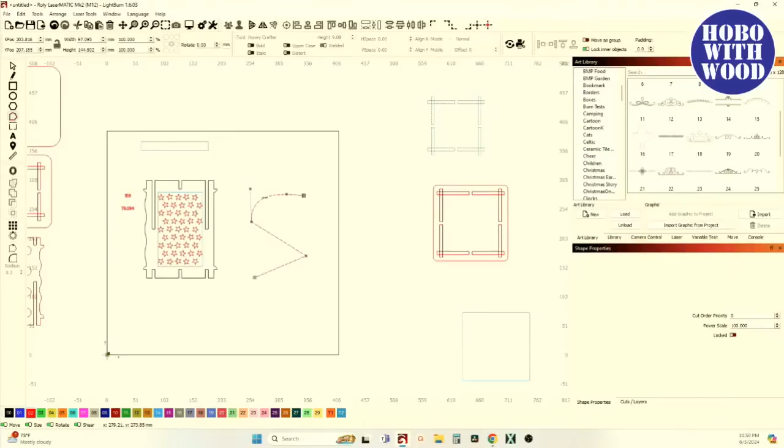This is going to be an awkward S because I'm just drawing this out freehand. But if you actually had a single line font—I forget what they call those fonts, but I've got some that aren't loaded—if you had one set to an S, then we'd put a bunch of marbles with it.

Grab all of those, group them. No, all right—what I was hoping you could do, and this isn't working right here. Like I said, I thought about it but didn't try it first.

You can assign text to a path, and I was hoping I could assign these marbles to the path. That would be really, really, really cool.

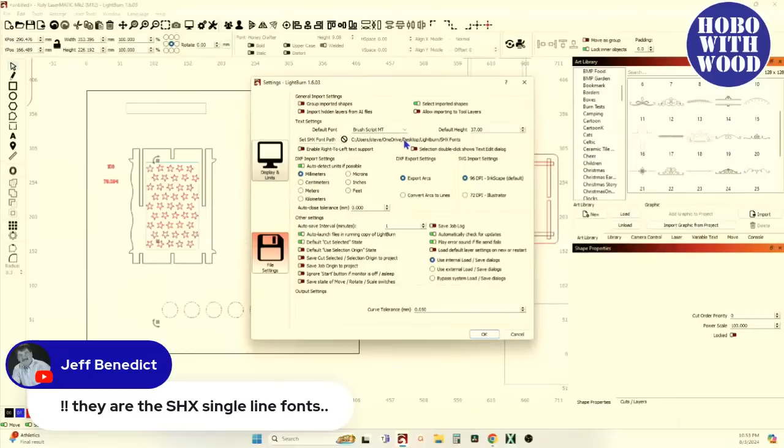So something got messed up. But if you have any SHX fonts, which are these single line fonts, you have to tell Lightburn where those fonts are at in order to have them load into Lightburn.

I was hoping that I could take these, select that, right click, and assign it to path. Because if I was to do text - Hobo with Wood, select that, apply path to text - I could put Hobo with Wood on that path and have it wrap around the S. I was hoping I could do that with the marbles, but it doesn't.

That might be something I would suggest next time I talk to them. No, the fonts aren't zipped. I had them, I did use them, but they're not there now. Whenever something happened in one of my last updates, it got mixed up.

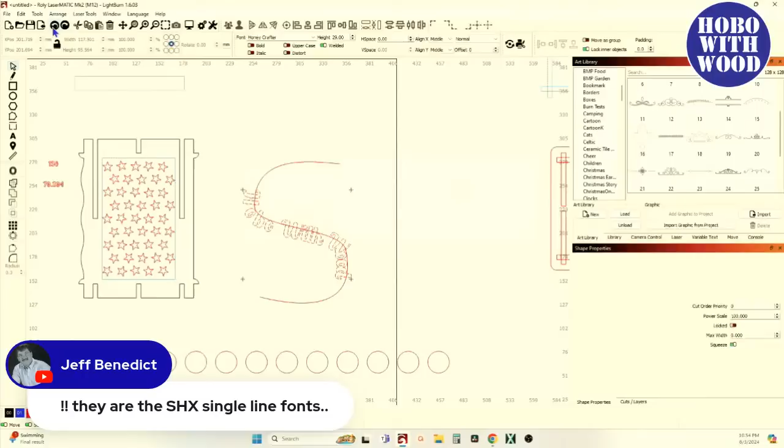I don't know, let's try. I don't think it's because whenever you do that - edit text shape, or undo. There we go, here, that's text.

Hold shift, select that, right click, apply path to text. So if I ungroup all those, and then grab that and right click, it still won't let you apply it to the path, because it's not text. Somebody mentioned - yeah, Chris said use the letter O for circles. If you had a perfect font that was a perfectly round O, you could do that.

But since your marbles are nearly perfect circles, your cutout needs to be close to that as well. So I thought about doing that same thing too, making them in the shape of a letter. That's why I was looking for my SHX fonts, and then I couldn't find them. Then I got sidetracked and didn't practice it, didn't try it, but it's only allowing you to apply text to a path.

All right, yeah, this is going long. My brain's fried and it's been 2 hours.

Just select one marble, then S, and select arrange, copy. Oh, copy along path. So you say select one marble, then the S, select arrange, and copy along path. Arrange. Copy along path. Okay.

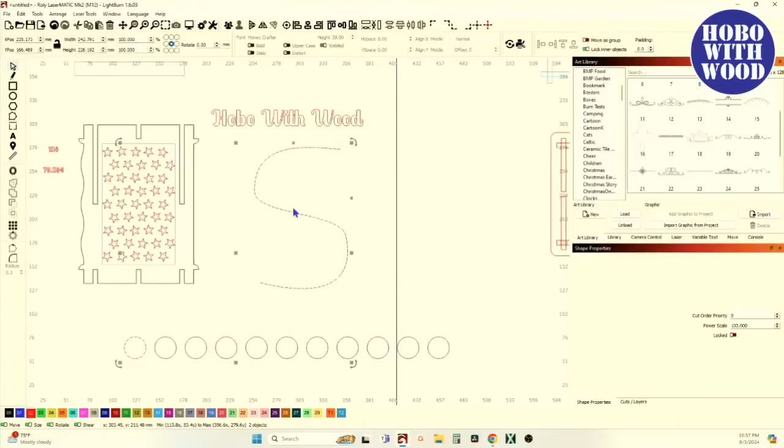So if you select, go back over here, you select one circle, hold your shift button, select that rough S, arrange, copy along path will open up another menu like your grid arrays. Number of copies, space between copies. We don't need to worry about auto increment variable text because we're not doing any variable text. We don't need to rotate them because they're perfect circles.

Cancel that. Let's grab that, put it up here, put it on the corner of that, hold shift, grab that, arrange, copy along path. There we go. And now it's putting them - how many copies. There you go.

Yeah, I got it, Tennessee. I figured I'd put the marble on the S first. So yes, you could do your marbles in the shape of letters. You would need that SHX fonts, the single line fonts, in order to be able to do that and have it look really nice.

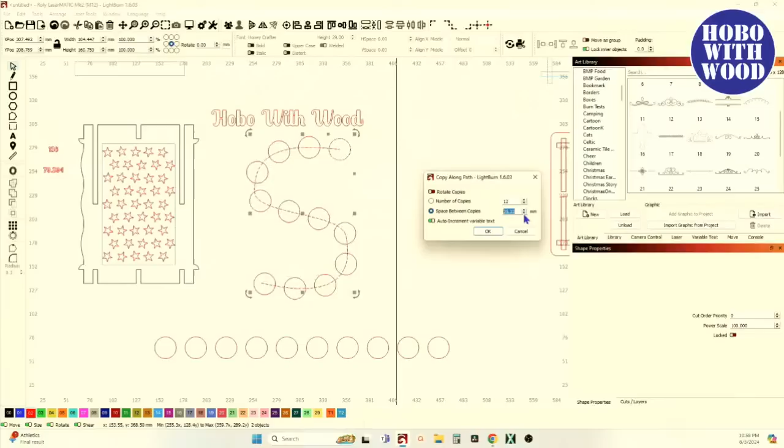And then position your first marble at the starting point of that. Copy along path - how many copies you want, or you can delete that and tell it what you want your spacing to be. I want it to be - yeah, so here I'm not telling it how many copies, I just tell it how much space I want between each of the marbles, and it will place them.

But it doesn't end there. That would look good like that, and say okay, and then there you'd have a perfect placement of your marbles. Perfect placement of the marbles right now would be good.

Oh, all right, so we got there together. Thank you for working with me. Thank you for your help on that, Tennessee. I knew there was a way to do it, I just couldn't put it all together tonight. But we got there, and I appreciate y'all. I really do.